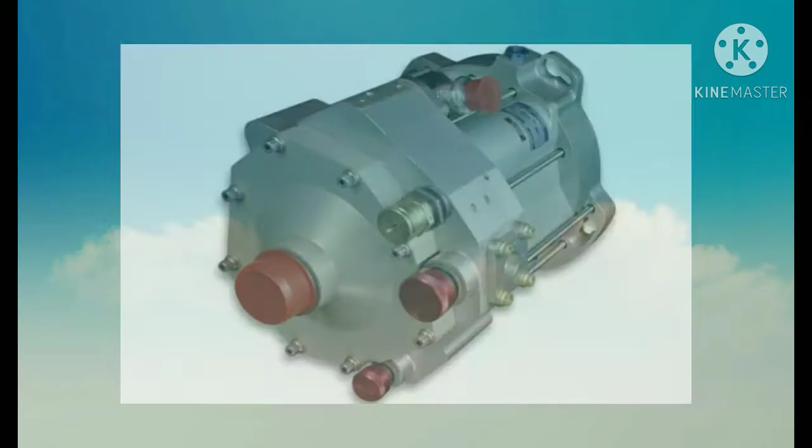Now I will tell how the open center hydraulic system works. For any hydraulic system, there is a minimum number of components: pump, reservoir, directional valve, check valve, pressure relief valve, selector valve, actuator and filter.

Now let's see the working of the open center hydraulic system. Firstly, the liquid from the reservoir goes to the pump by sucking the fluid. This pump increases the pressure and goes to the selector valve and back to the reservoir. In the open center hydraulic system, when the actuating mechanism is idle, there is no pressure in the hydraulic system.

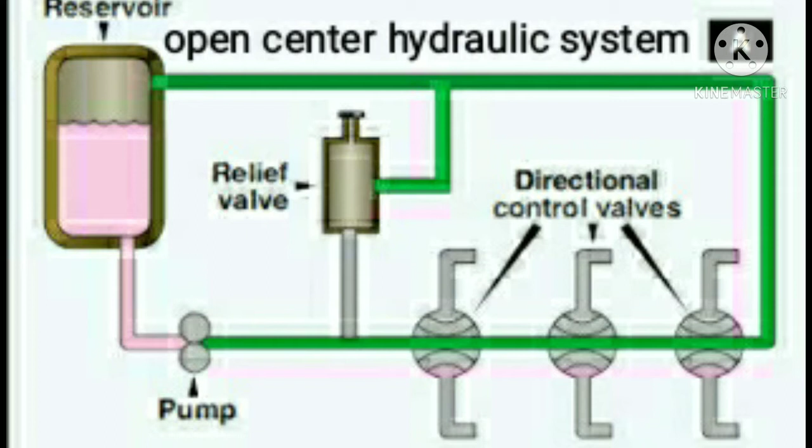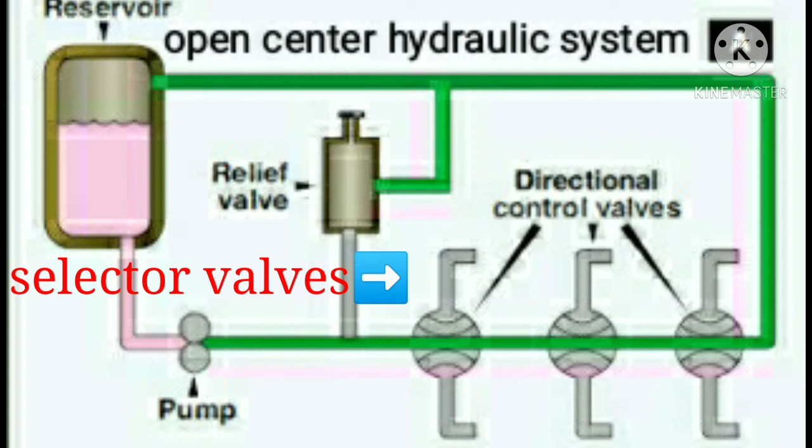The open center hydraulic system has many subsystems, using a number of selector valves fitted to the system. The selector valves in the open center hydraulic system are connected in series with each other, as shown in the figure. The system pressure line goes through each selector valve and fluid flows freely, then returns to the reservoir, until one of the selector valves is positioned to the operating mechanism.

When one of the selector valves is positioned to the actuating cylinder, liquid comes from the pump with pressure and goes to the selector valve, then the liquid is directed to the actuating mechanism.

With the selector valve positioned as shown in the figure, the flow of liquid blocks in the selector valve and pressure builds up, so the system moves with pressure. Because of the piston, the work is done and the liquid in the opposite end of the cylinder returns to the reservoir.

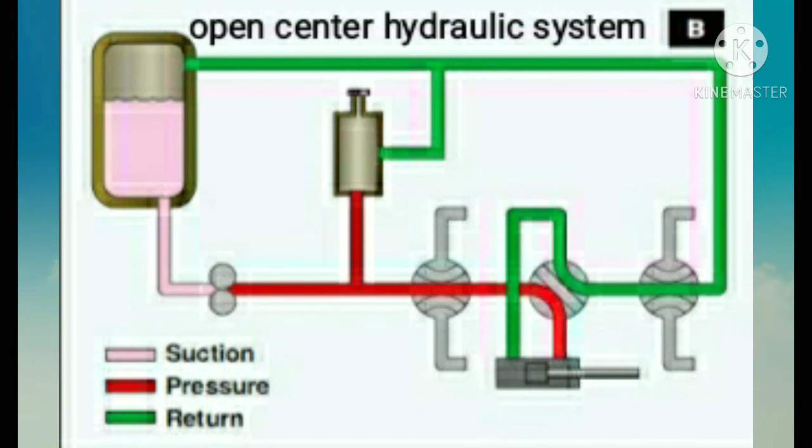Now I will tell about the closed center hydraulic system. In the closed center hydraulic system, the liquid is under pressure whenever the power pump is operating. The actuating cylinders are connected in parallel with each other.

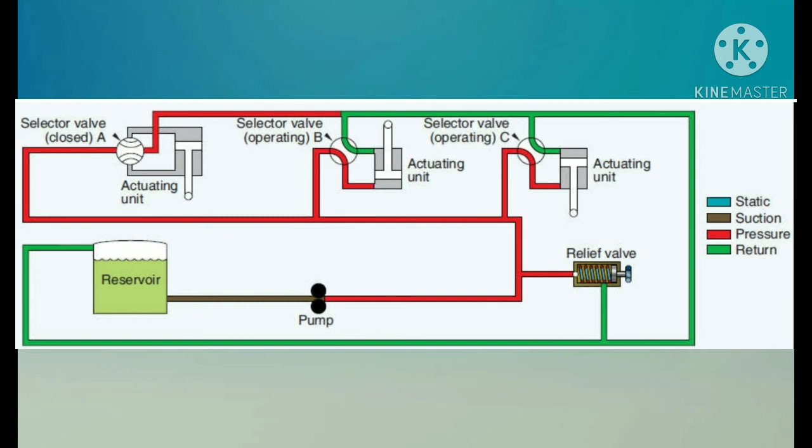In the closed center hydraulic system, when one of the three selector valves is closed, the other two selector valves are open and the actuating units connected to those two selector valves will work. As shown in the figure, from the reservoir the liquid goes to the pump by suction, and from the pump it goes to two of the three selector valves and then to the piston. Liquid in the opposite end of the actuating unit returns to the reservoir.

The difference between the two systems is: in the open center hydraulic system, the selector valves and actuating units are connected in series with each other. But in the closed center hydraulic system, they are connected in parallel with each other.

The second difference between the open center and closed center hydraulic systems is the pump used. In the closed center hydraulic system, a variable displacement pump is used, but in the open center hydraulic system, a non-variable displacement, constant delivery pump is used. The advantage of the open center hydraulic system is that continuous pressurization is not required.

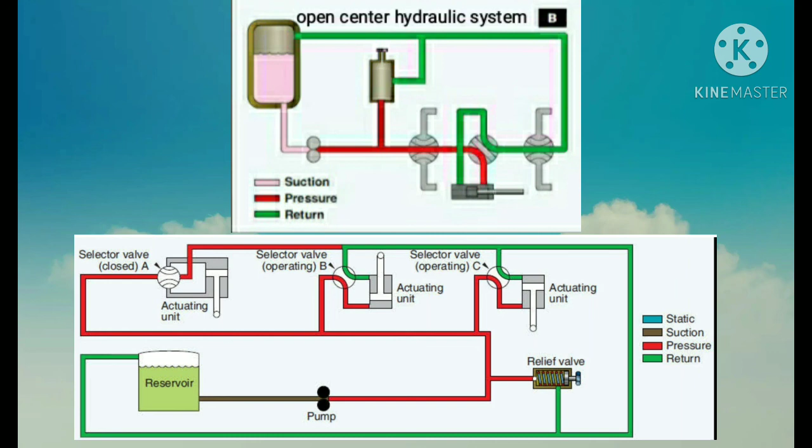This closed center hydraulic system is used in many more places than the open center hydraulic system.